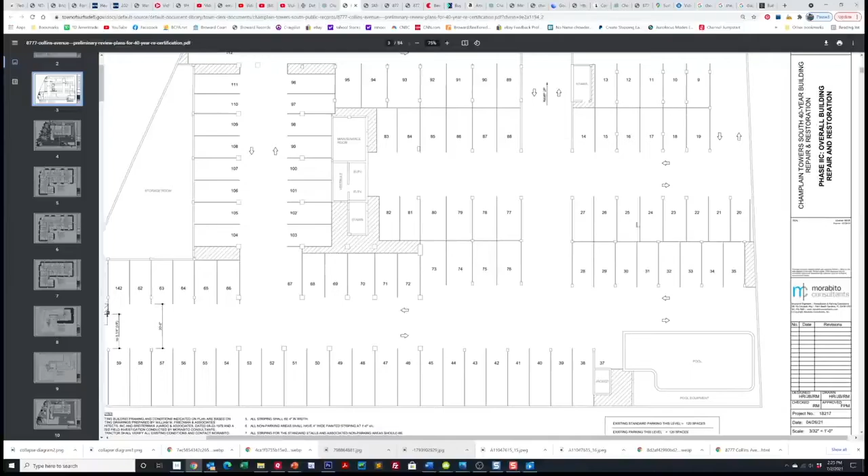So we know for a fact then that the pool deck collapse took in all the way up, probably around in this area here. I'm going to estimate right in this area. All of this collapsed.

Okay, and now here is some other really good crucial evidence. This was taken by Getty Images, and I'm assuming this was the next morning. But take a look, folks, here. Here's a great bird's eye view of the actual collapse of the pool deck.

The pool is still intact right here, and you can see the shape of where the collapse was. All the way up into here and into here. Ventures over into here, and I think the break happened right here.

Here's where you drive in off the street. These cars are still at street level. All of these cars here, it looks like between 6 and 8 cars, they tumbled down into the garage right below them. And that white stripe right there is the top of what should have been the garage, because down in the garage, the posts are all painted white.

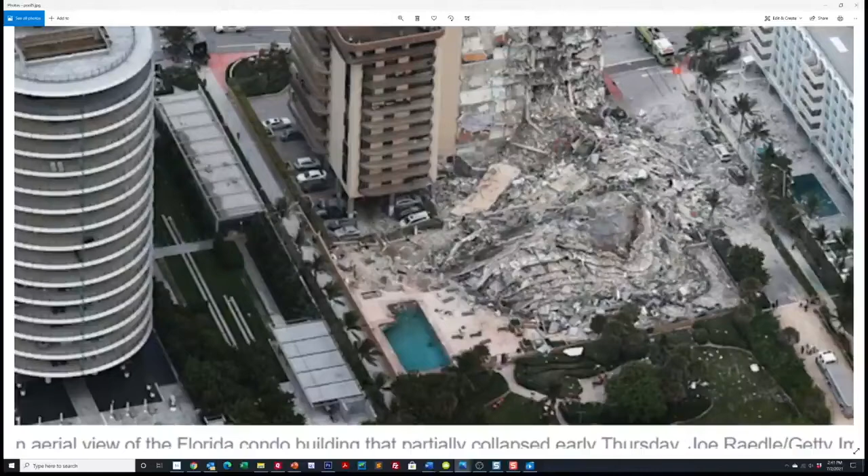Okay, so here's the general cut right here. It goes right along here, and I'm willing to bet it's all the way around in this area here. Here's the entrance to the garage. This is the ramp, is probably like right around over here. The ramp ends at the 50% mark of the property, which would be right here, see?

So the ramp ends like right around here, and the bottom of the ramp here is where initially we saw that video that had all of the stuff on the bottom of the floor there that was coming off the ceiling too, and then the broken pipe was there. So where is this located? Well, we know that this is spaces 72 and 73 right here. See, remember, 72 and 73, those are those two spaces right there.

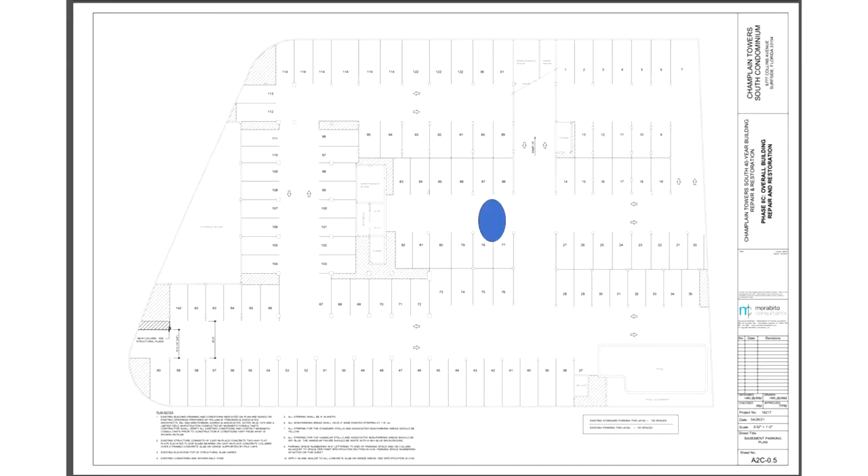And remember, folks, right over here is space 78, where the pool contractor the other day saw all of that water pooled up right around here, and we still don't know why. But isn't it a coincidence that it happens to be all in this general area where the pool deck collapsed?

So another thing too, you can see how this picture verifies what I said. This is the part of the building, that last part to fall, that was facing the ocean. And remember I said it was leaning towards us, towards the security camera, which was way back over here, and it fell slightly over to the left.

There's your layers, and this is why I've been telling people I don't think they're going to find any more survivors. Because this is the roof here. Let's assume this was 12, the roof, and then 12, 11, 10, 9, 8, 7, 6, 5, 4. So the lady who was supposedly out on her patio talking to her husband when she said she saw the pool deck collapse over here and she saw what she thought was a sinkhole, she forgot the garage was underneath there. So that's how that happened.

But you can see how it almost looks like a package of bacon. Whenever you get a pancake building that collapses, it's just devastating. There really aren't many voids in there. Here is video of the sunken pool deck, and if you look on the right, you'll see the space. They're looking right into the garage where it has sunk down to that level now.

Now what's interesting is look at the back wall. I mean, it sheared right off of that wall. Whatever happened here, whatever weight or whatever failure mode occurred here, it took the entire pool deck down here vertically. And what I am still struggling with is the size of these columns here.

And what really bothers me, folks, here is how the pool deck at every one of these columns, it just sheared itself right down the column. These support columns are supposed to do just that, support. So why did it happen? Why did the concrete just strip itself from all of these strands of rebar that you can see on every one of these clean? I mean, I don't even see a chunk of concrete.

This shows it even better. Look at the size of all of these columns right here in the tower that survived. See, nice and beefy and meaty, and yet these guys get these little skinny toothpicks. Just like the FIU pedestrian bridge here in Miami that collapsed a few years ago.

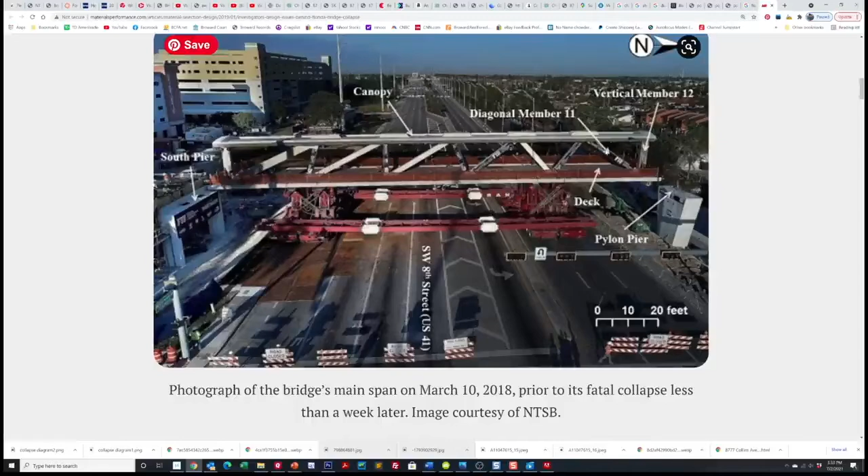If you look over here on the right, why is diagonal member 11 right here skinny while the member on the other end of it is nice and thick? See how these others are all nice and thick, but yet this one suddenly got skinny on us, and the failure occurred right here.

See, even when you look in the plans for the garage, all of these columns over here on the lower left belong to the tower that's still standing, and even right here. Why are these so much bigger and thicker than all of these support columns here on the other tower? So that one really gives me pause, folks, and I'm wondering if that's not a mistake.

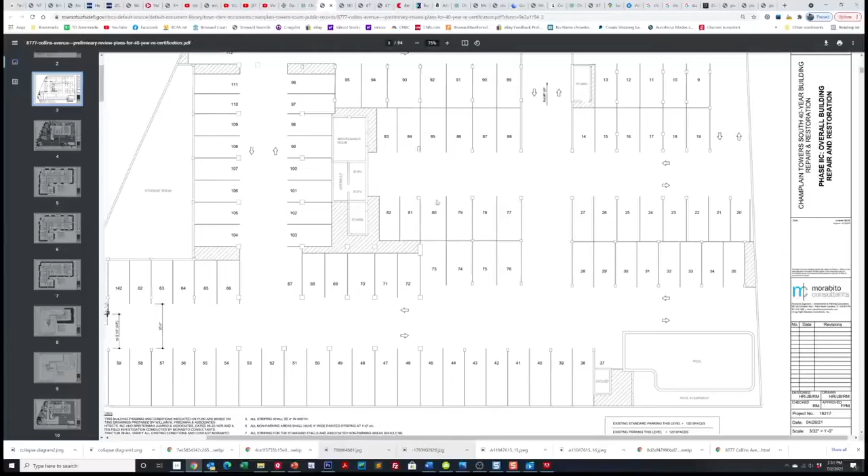You know, I'm not going to rush to judgment on this, but whenever I've seen collapses that I've studied in the past, I see this kind of thing, and I always wonder, why was that member skinnier than the other one? Okay, now let's see which of the columns failed first.

So, as you can tell, the whole center part of the building starts to fall first. So it's this whole part, everything from the shear wall right here all the way over to this building, including probably 2 of the columns here, because you got to take into account this part fell, and then over here on either side of those white stripes that collapsed as well. See, it just ripped it right off of that building. So let's see which of those columns it is.

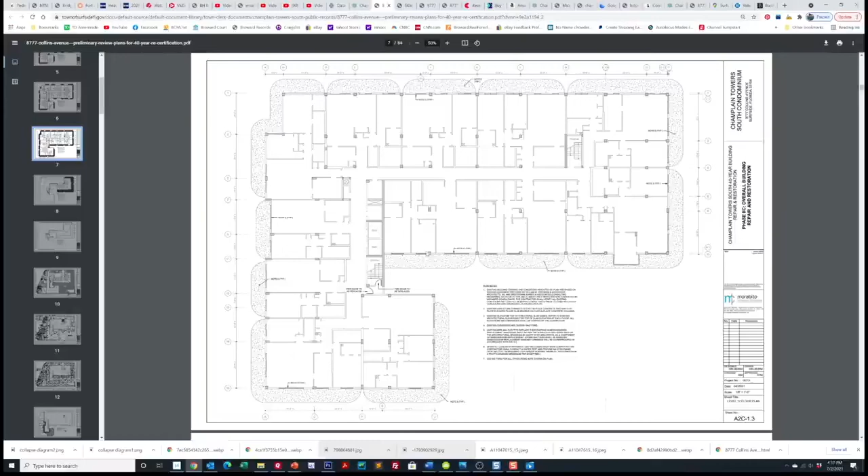All right, so as we look at the floor plan here, this is the shear wall. This is that center part that everybody says collapsed first, and I agree that this is the part that collapsed first. It also, as I showed you in the picture, took out this column here and probably some of this. So this part of the building, the right-hand side of the building, got sheared right here. And then we have these 5 columns, 1, 2, 3, 4, 5.

Okay, so looking back at the overview of the entire building in the plaza, remember it's 1, 2, 3, 4, 5. It's those columns that gave way first. And if you overlaid the garage floor plan on top of this, you can see which ones it appears to be. It appears to be 1, 2, 3, 4, 5. And you notice how it just so happens to include our good friend parking space number 78. Do you remember we were talking about that twice already?

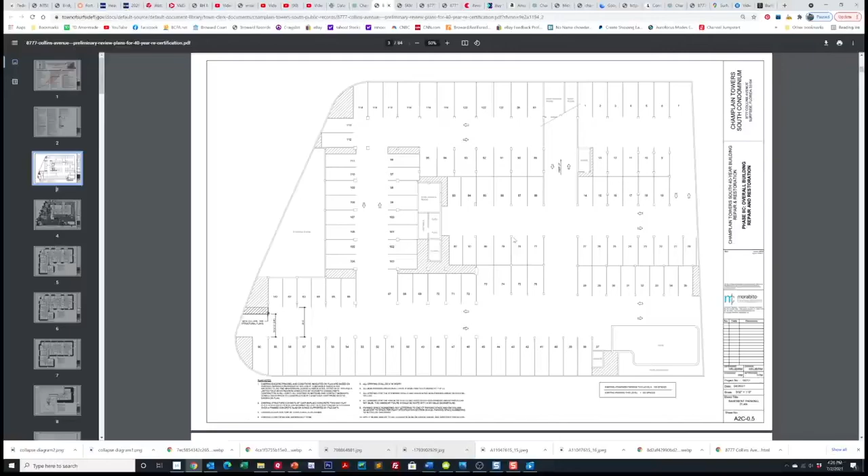So here I've drawn my red ellipse around what I think are the first columns to collapse. And I gotta tell you folks, as an engineer, I've always pointed out to you, everything has to jive from all different angles. And we've looked at the timing, we've looked at the witness accounts and everything. And even the pool contractor said this is where he saw that pool of water. So there must have already been something going on here in this area, leaking from the ceiling.

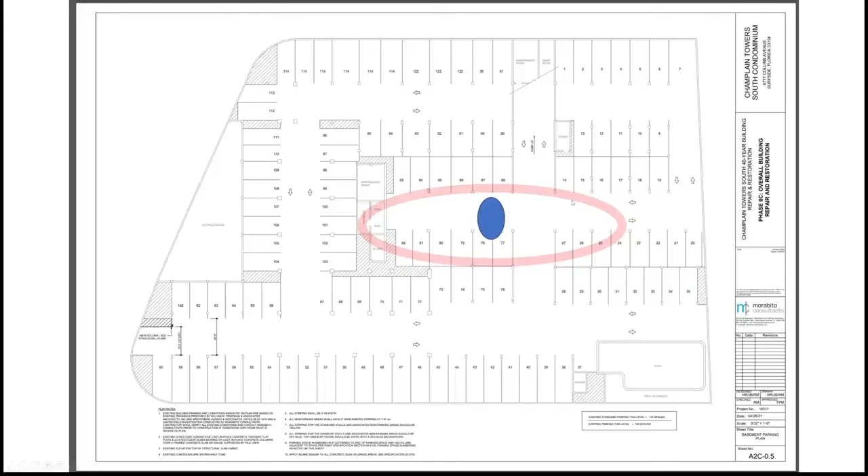And as we saw from the tourist video shooting down this way, this is where we saw the pile of everything. So this is where it all started, right here. And once these 5 critical columns go, and then the building above it starts to collapse, that's it. It's all over.

Okay, so let me show you here on the video where I think all of the other people got it wrong and why. And I wish they had given us more video from the start. This isn't really at the start. This was somebody hand-holding their cell phone after it already started in front of the security screen. So watch that first section in the middle. So there it goes, right? Taking down the right section with it. But you see how it's leaving up here, this section behind it?

So we know that all of the building didn't just collapse at once, even though a lot of the conspiracy theory people are coming in here telling me, oh, that was a timed explosion, it was a controlled implosion, and it was done on purpose, and blah, blah, blah. No, so it came down first. Then here you can see the second part of it is starting to drop, right?

But wait, there's more, because after it drops, you see that dark shadow up top here? You're going to see something forming here, and it's going to be the third part that drops right there. Do you see that? You see this part right here? This has not yet dropped, so that looks like the far north wall of the condo. See how it's still standing there?

And you can see it still has a light there on. So it's amazing that the electricity is even still working at that point. And so there it goes, and then right now, boom, you can start to see that third section drop. So everybody got it wrong. All of the people that showed it breaking off in basically this section, and then the back section, and then this section. It wasn't 3 sections, it was really 4 sections that it failed in.

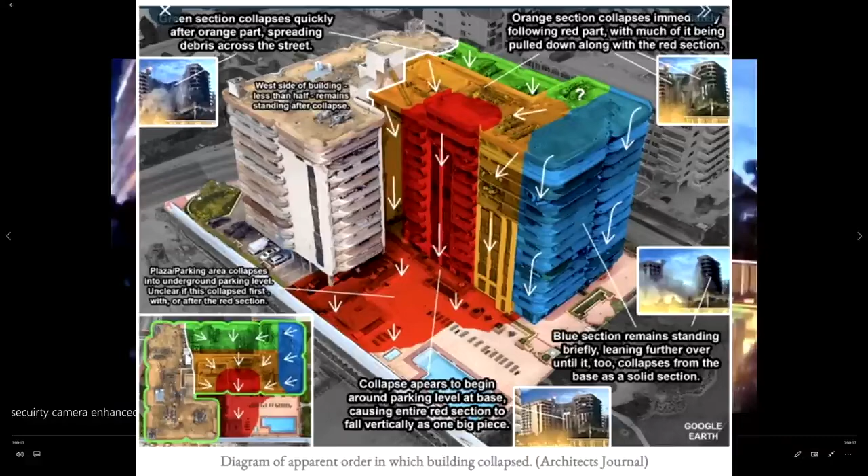So these guys here from Architects Journal, I think, had the most accurate drawing of what collapsed first. Although I still think that this yellow section here and this red all collapsed at once, because I believe all of these columns gave away. And then second would be this, because it started to tear at this.

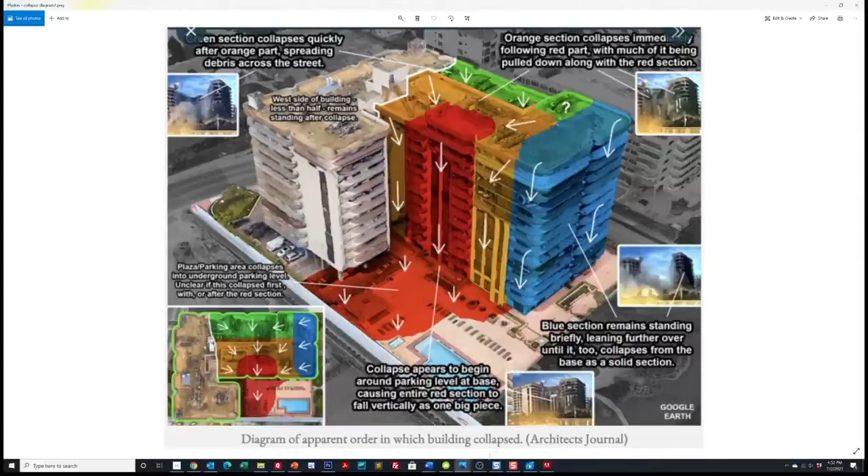And then third would be back here. And then fourth would be this section here that I just showed you a minute ago. And then last would be right over here, that skinny part of the tower that was left. So these guys were the most accurate so far. Okay, so how did it fail?

Well, this is that famous engineering report from 2018 where Morabito Consultants, who we used some of their floor plans here in this video, prepared this report. They walked the property, they found things they didn't like. They said all of the windows need to be replaced because numerous residents are reporting leaking. That's not going to cause a problem.

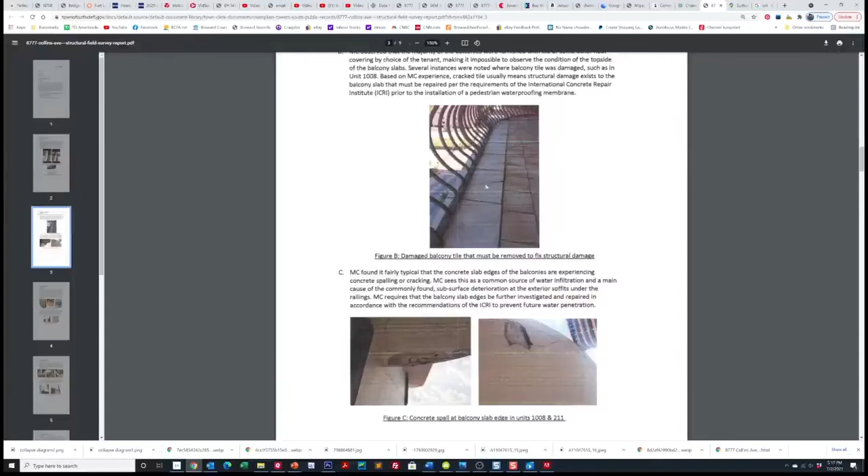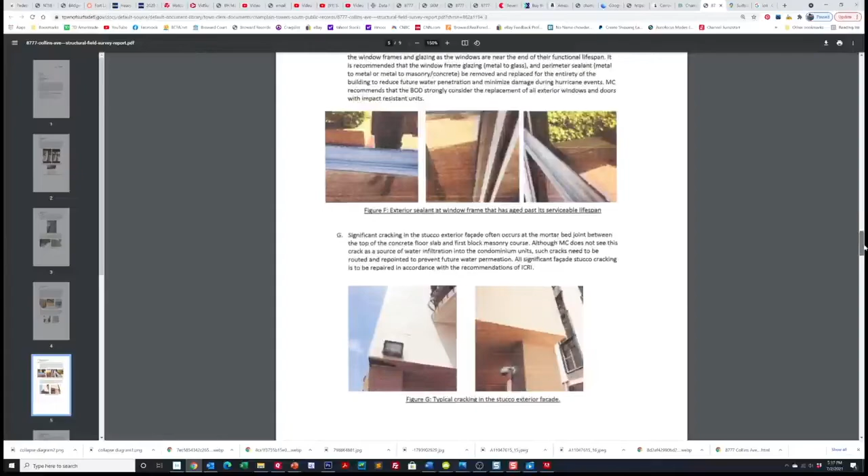They found cracks, like you see here, on some of the patios and spalling, and again, that's not going to tear down your building, but they did say these do have to be repaired, and that was actually being worked on already as part of their 40-year recertification plan. They were getting ready to start it. They were already doing stuff up on the roof. This is what I think here is leading to the root cause of our problem here.

So he's talking about the whole pool deck entrance here and the waterproofing. If you look right here, he says the failed waterproofing is causing major structural damage to the concrete structural slab below these areas. Failure to replace the waterproofing in the near future will cause the extent of the concrete deterioration to expand exponentially. That is the key word right there, folks.

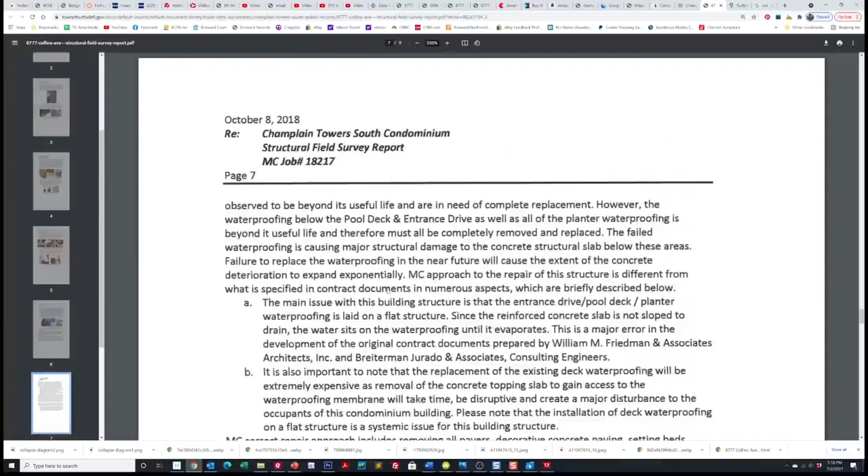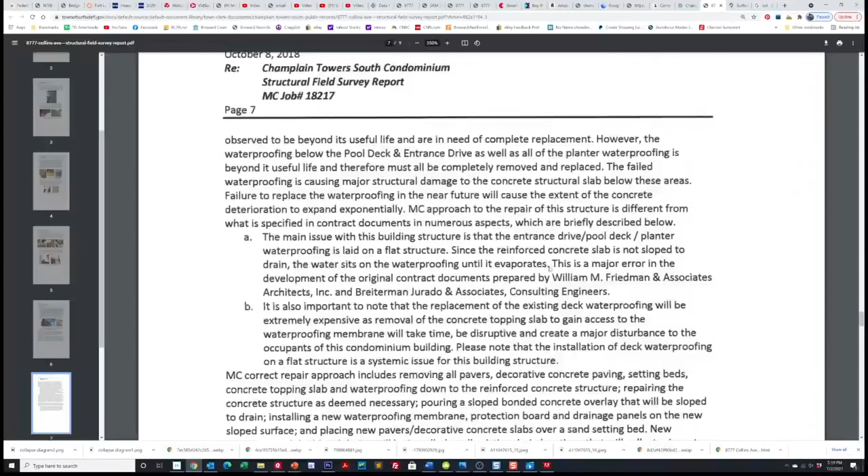Exponentially. From 2018. Here we are 3 years later, and it has already expanded exponentially because they never got around to fixing it. And so they listed all of the stuff that's got to be done here. They also said there was a major error in the design by the architects originally. The reinforced concrete slab, which is underneath the deck there, is not sloped to drain. The water sits on the waterproofing until it evaporates. This is a major error in the development of the original contract documents.

Here's something else that makes me suspicious. Here's before the building collapsed. I got this from the MLS system for apartment rental in the building. But look at all the water that's pooled up here on the deck on a day where it's not raining and the rest of the deck isn't exactly wet either. Why are there these random collections of water here?

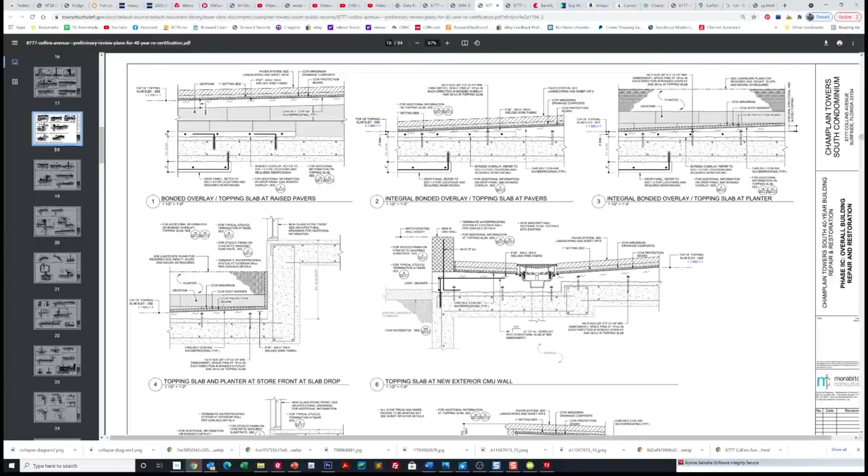And what that says to me is that because the concrete substrate underneath all of these bricks is flat and not sloped to get rid of the water, I think the water collects up in between the cracks of all of these pavers whenever it rains, and it just sits there until it can dry. And that would add a lot of weight onto this pool deck. See, as part of the design, the engineering company wanted to add sloping all over the place there on that deck. That would help drain the water better.

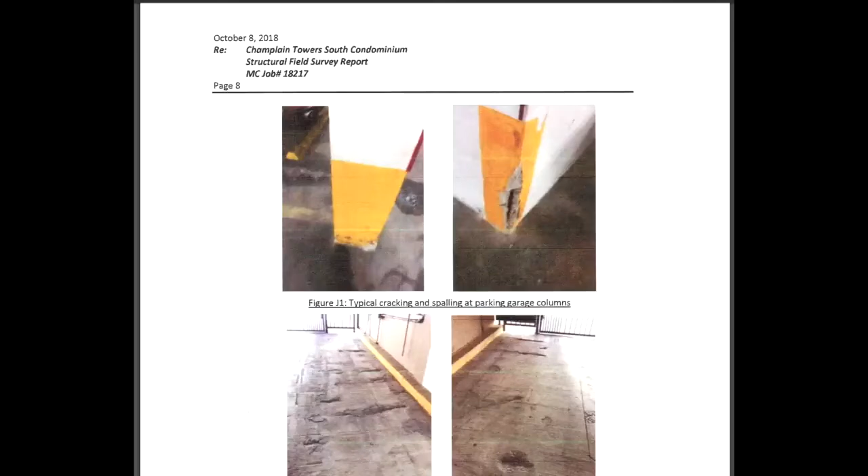So my theory is that we had a lot of water intrusion on the pool deck that eventually got down to the non-sloped concrete reinforcement structure below, which eventually soaked up water and got the rebar all rusty and caused spalling all over the place, and eventually it caused the collapse of the pool deck, which pulled down 5 columns with it and caused the collapse of the entire building.